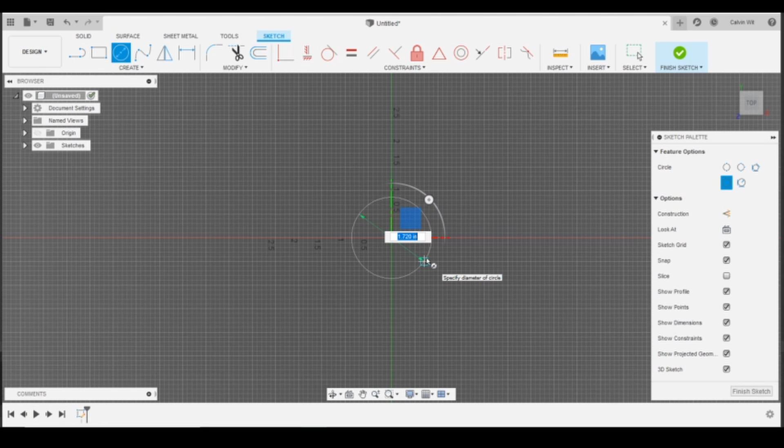So let's get going. First things first, I'm going to select the top view here on the view cube, press C for circle, and select my plane. In this case, the diameter of the base is 4 inches. I'm going to press Finish Sketch, and then holding down the Shift button and the middle mouse wheel allows me to move around. Alternatively, if I was in the top view, I could always click on this edge here. Personal preference, you do what works best for you.

Now we're going to press E to extrude, and we're going to pull this up 2 inches.

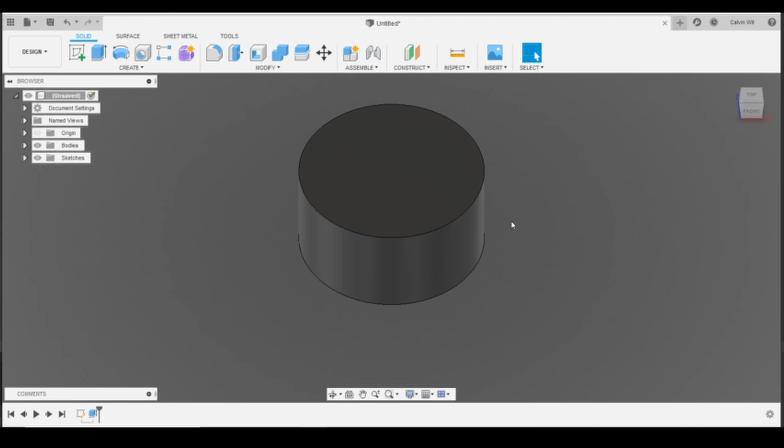Now we need to cut the internals out. So we can press C for circle, click on the top of the circle, and find the center, and we're going to want to come out 3.5 inches, and the base of our light is 3.25 inches. So we can press C again, and we can go 3.25 and hit enter.

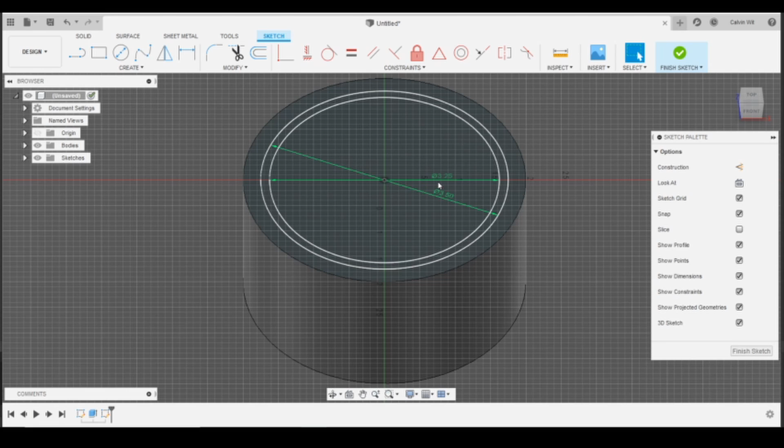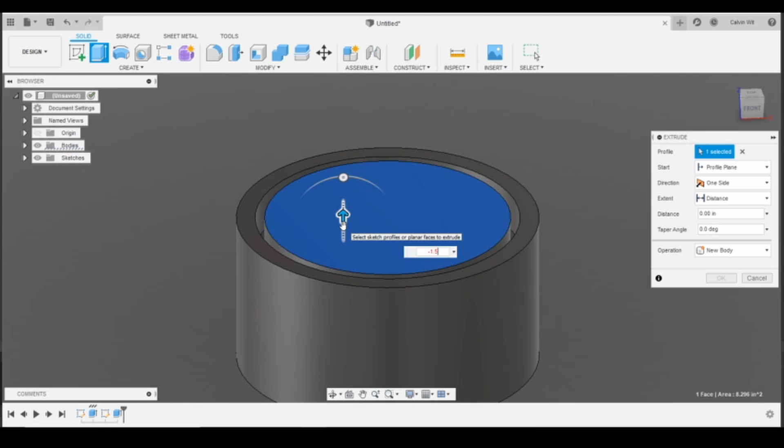Now what we can do is we can press E to extrude, and we can select, it doesn't really matter the order, but we'll just start with this guy here. It comes down negative 0.5 inches, and you'll notice that it's cut out the material that was there. That's what we want. Then we can press E again, and we can go negative 1.5 inches and hit enter. So now what we've literally done is we have created the base for our light. Nothing fancy, but it gets the job done.

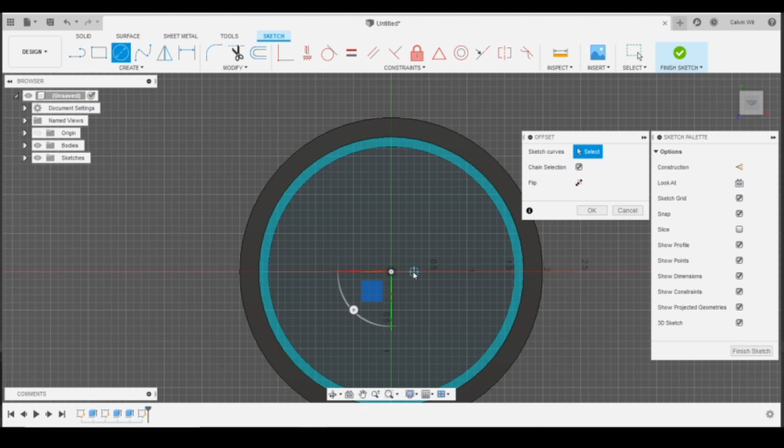Now what we can do is we can press C for circle, and we're going to want to select this lip right here. I'm going to switch back to the top view. There's two ways that we can do this. For the purposes of teaching you, I'm going to go O for offset, and I'm going to select this line here, and I'm going to go negative 0.125 and hit enter. So what that did is it took this edge here and pulled it in. Obviously, you could have just drawn a circle there, but for the purposes of showing this off, I figure that's an easier way.

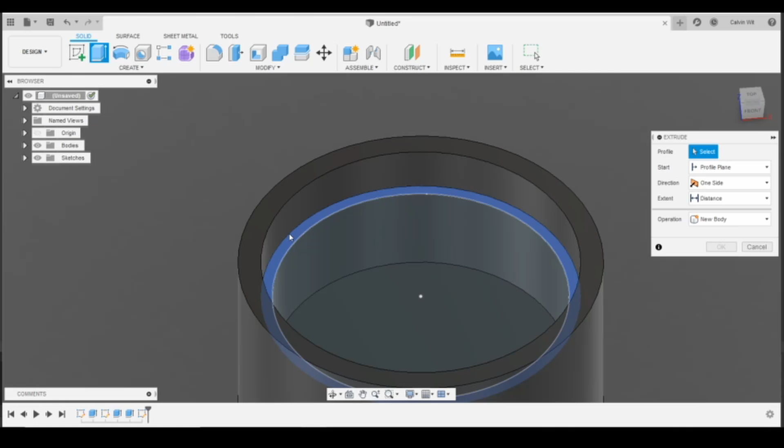So now we can press E to extrude. We want to click on here, and we want to pull this up 12 inches. Now you'll notice it automatically defaults to the join command. We don't want to do that. We want to switch to new body and hit OK. So what this did is instead of making these together, it's made them as two separate components.

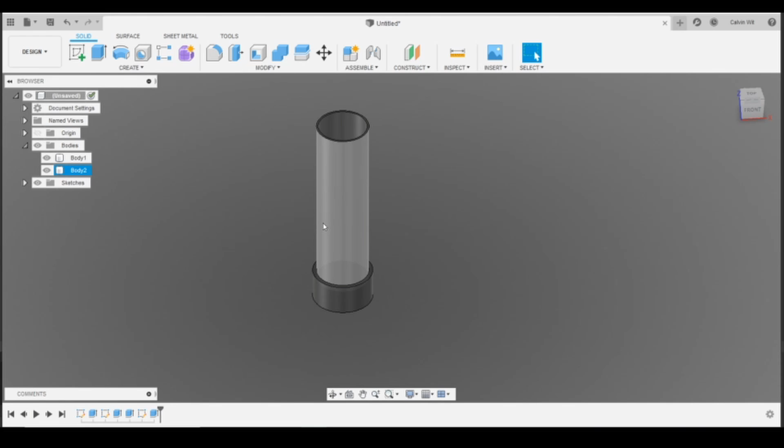This will come in handy because, say, the tube is going to be clear polycarbonate or acrylic. We don't want that connected to the bases. We want that to be separate. Also, if you're going to do rendering, which I will show you very quick, here's how to visualize what it would look like in a few minutes, you can do that as well. But the main thing is we don't want those to be connected.

So now we can switch back to the top view here, click on the top, go to top view, find our center point, and we can come out 4 inches.

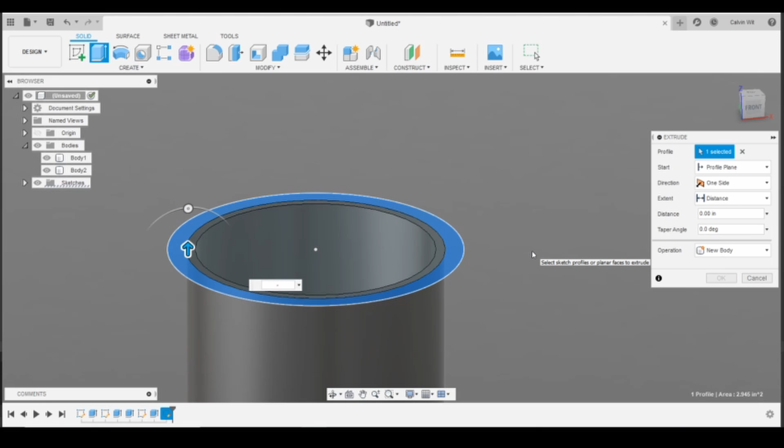And then what we can do is press E to extrude, and we can pull this guy down negative 0.5. As before, we want to do it as a new body and hit OK.

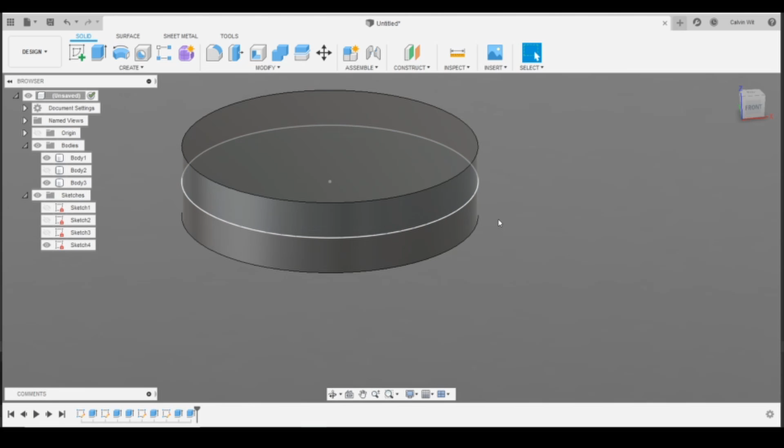Now we want to turn off the middle tube for the moment. Then we can click on the triangle here and turn back on sketch number 4. Hit E to extrude, click on the middle, this and that, and we can come up 0.5 and hit enter. Turn off the sketch, and hey presto, we have our light.

Now let's give this more of a realistic appearance very quickly by pressing the A button, which calls up the appearance tab.

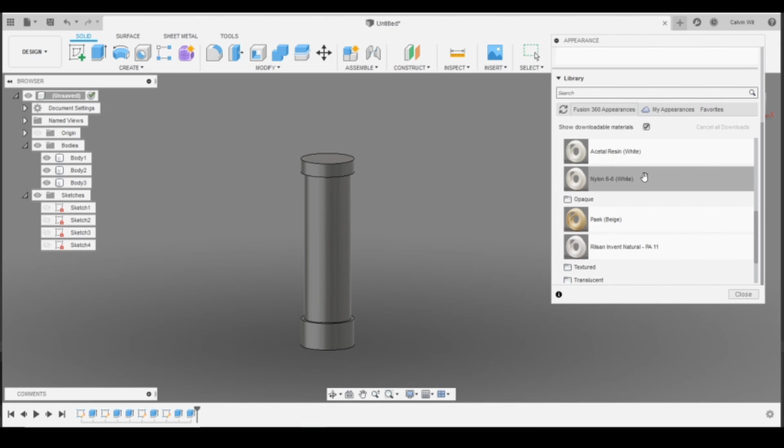We can go down to plastic, and in this case, to simulate the closest to the flexible material that I used would be nylon 6/6. So we'll just set that there, and we'll set that there.

Then we can come down to transparent, and we can click on polycarbonate clear, or you could really do any of the colors that are there, and hit close.

So now we have created the light very easily. And you can also see now that these are separate materials, you can see what it would look like.

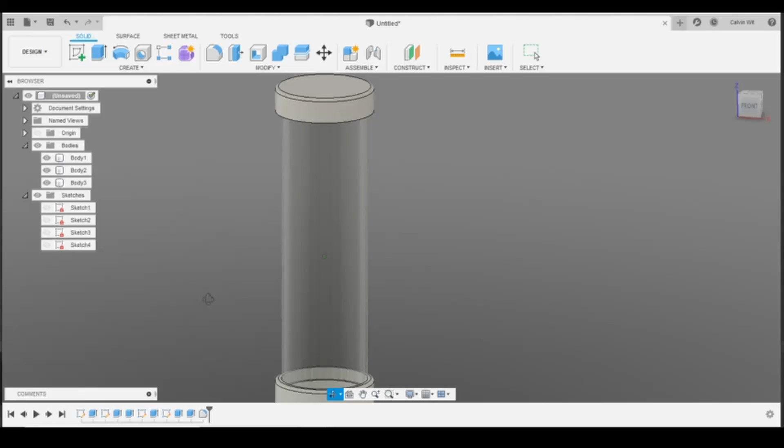I'm just touching on this for the purposes of if you want to mess around, but you can press on the fillet command and start adding some nice visual beveling to the items. Hit enter, you can mess around with it. I personally recommend doing that. Whoops, I didn't want to do that actually. You can mess around with that if you want. The main thing is I'm just trying to show you two different ways to do this.

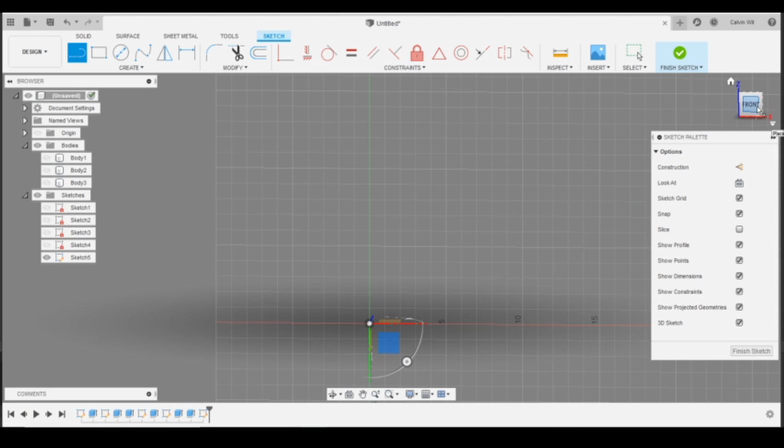Now let's work on drawing this exact same item using the Revolve command. So we're just going to keep this sketch up and click on the middle here. We're going to go back into the front view, but this time I don't want to draw it directly on the center. I'm going to come over to the side here so we can have the two side by side, and we're going to be drawing half the profile of the light in one sketch.

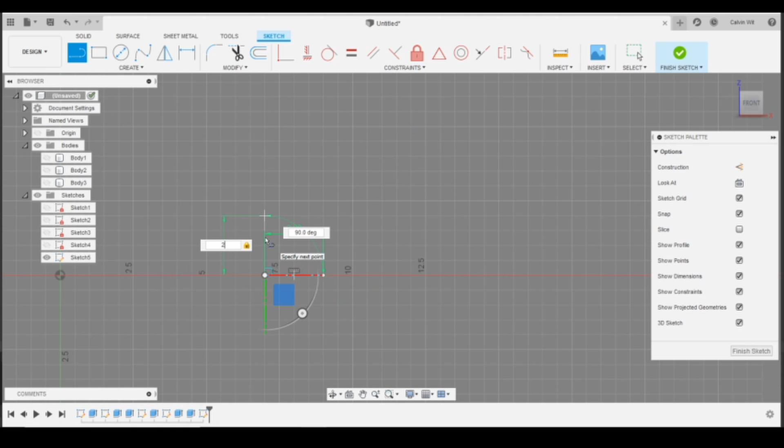Obviously our base would be 4 divided by 2, or 2 inches. We want to pull it up 2 inches. Now we also need to come along and make this distance 0.25. Then we want to pull this down 0.5. Whoops, I didn't draw that line. I want to pull that guy down 0.5 of an inch.

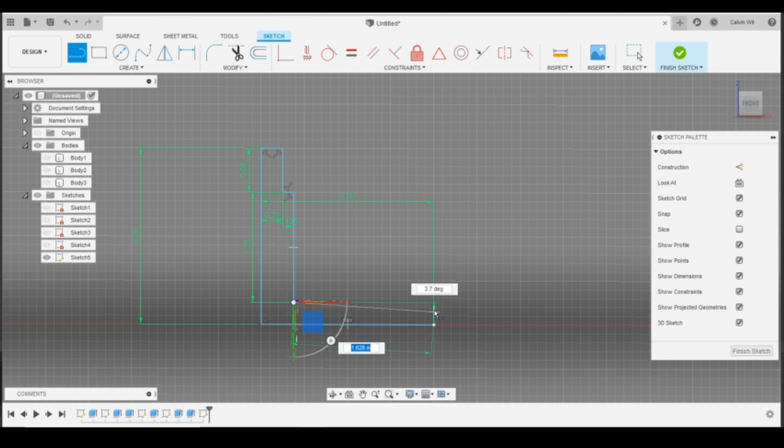There we go. Then we come over here, 0.125. Then we come down with this 1.5 — whoops, that was supposed to be 1.25. Then we come over with this, go over. You'll notice what I did here is I dragged my mouse down and then dragged it up so it snaps to that distance there, and go down, and there we have it.

So here is our very basic side profile, and if you look at this, you'll see that they look just about the same, which is perfect.

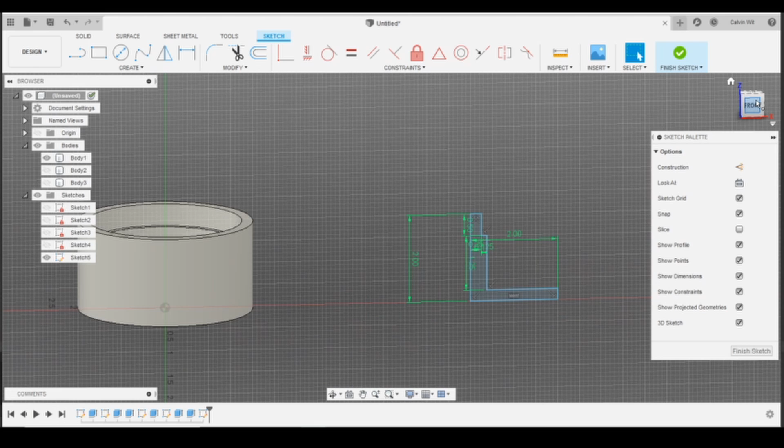Now what we need to do is draw the tube itself. So you can press R for rectangle. We can select that point and snap over. Alternatively, we can use the tab key to go between. We can go 0.125, tab over and type in 12, and hit enter.

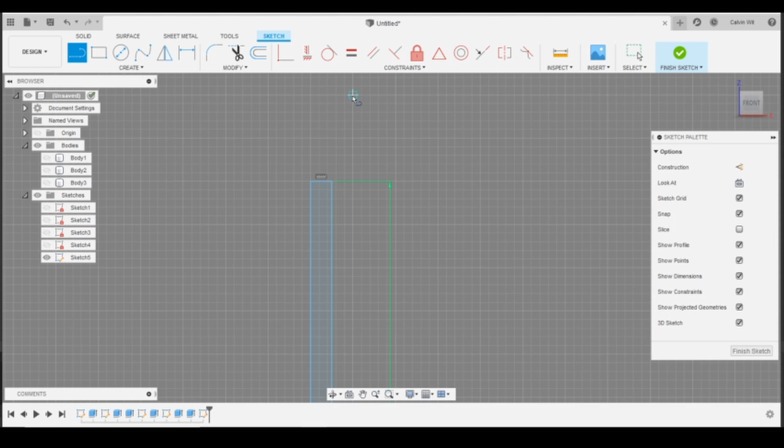Now we can zoom out and draw the top. So now we can draw a line from here down 0.5 of an inch. We can go over 0.25 of an inch. We can come up 1 inch. We can go across 2 inches, come down 0.5 of an inch, and come across to there.

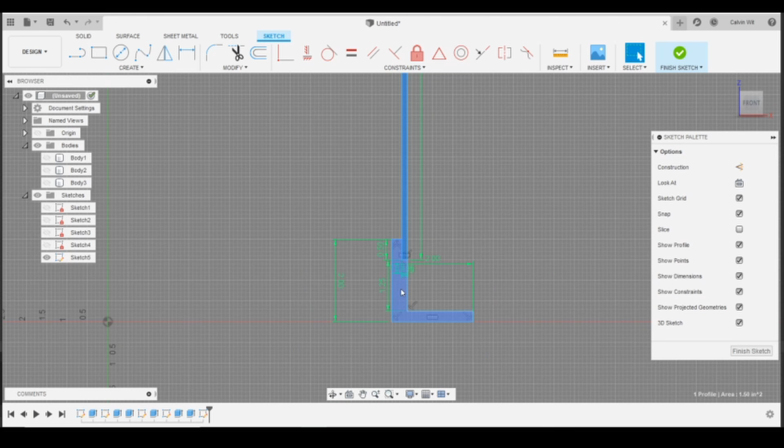Now you've got to make sure that all of your sketches are closed, otherwise this command will not work. So there we have it — there is the side profile of the 3 components that made up our light that you see there on the left. So we can hit Finish Sketch.

We're going to click on Revolve, and I'm going to select the top and the bottom pieces. Then for the axis, we're going to want to select this right here.

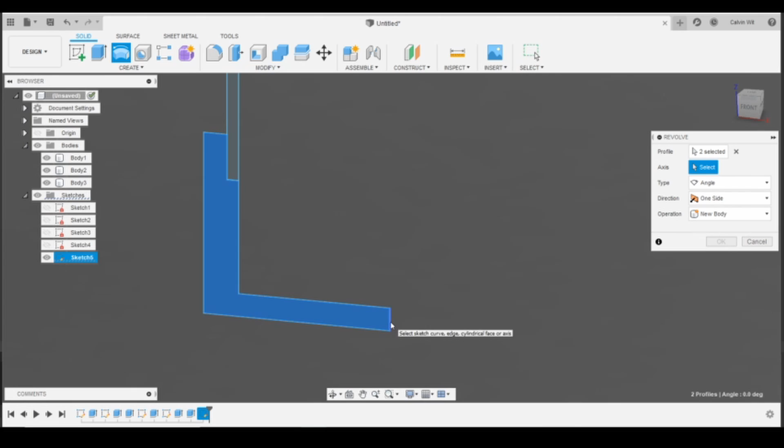If we had built this around the origin, we could have used that as well, but that would not have worked for this. Then we can hit OK.

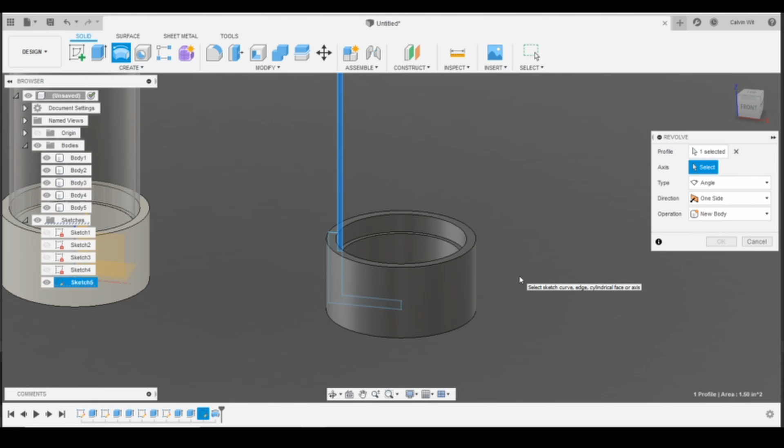We can turn back on our sketch, click on Revolve again, and use that as the profile. This time, since we already have existing geometry, both of these share the same center point, so they share the same vertical axis. I can just click on that and, presto, I've got my circle. Don't forget to make it a new body as well. Then we hit OK.

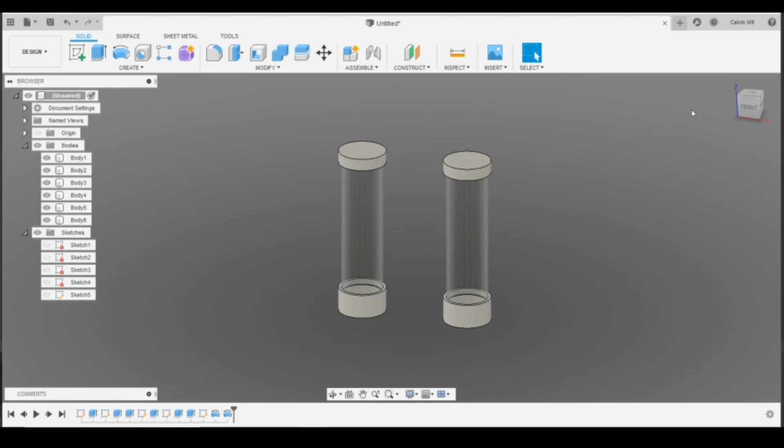We can do our very simple appearance again. Make the middle clear, make the top, make the bottom. Whoops, dragged that too fast. Make the bottom the nylon 6/6, close that out, and there we go.

Now, the only difference in building these is it took all of this to create the left-hand sketch, and it took all of that to create the right-hand sketch.

If you're starting out and kind of mucking about, using the left-hand method is not a bad idea. But if you already know how to do it and you're trying to go back and condense the drawing down, since you've extrapolated whatever dimensions you needed or already know the dimensions, using the revolve command is a much more efficient manner of doing it.

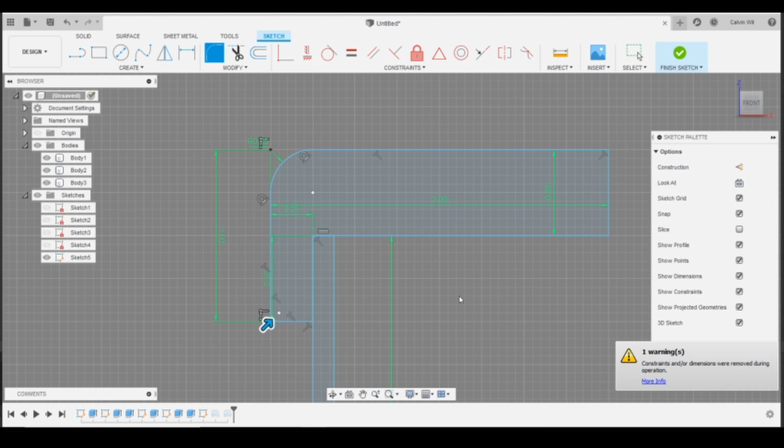Also, the advantage of using revolve is, let's say I wanted to add a nice fillet to this edge, and I'm not even worrying about the actual dimensions—I'm just typing in something that looks nice. Throw that in there. And we'll throw on something nice down here as well. Hit enter, finish the sketch.

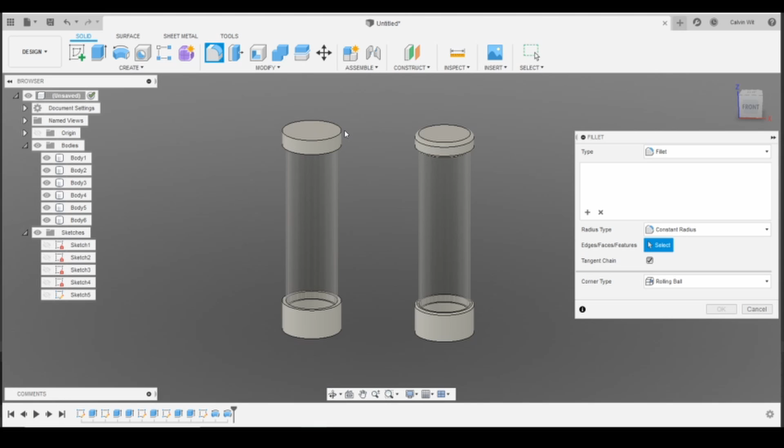Now all of a sudden our parts have that nice cosmetic touch to them, but I didn't have to go ahead, come over to the drawing, press F, and individually add them if they were different sizes.

They were automatically there. Now, the other advantage is I'm going to create a very simple texture on here using circles. So I'm going to go 0.125, press T to trim, and add a fillet between here and there of 0.125.

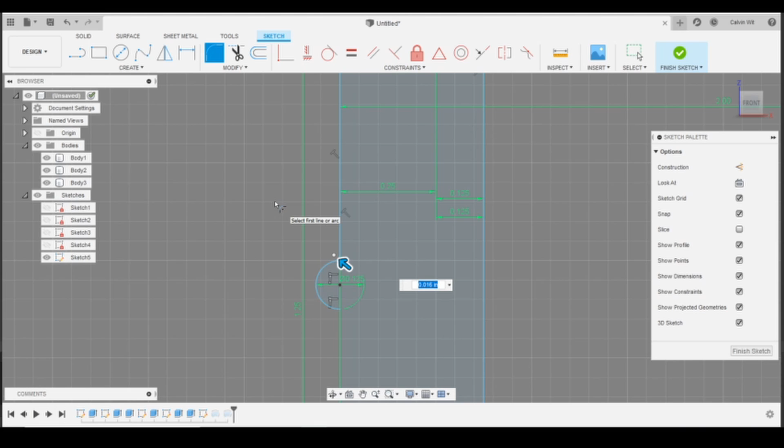We'll do that. Now you notice it took away the line that's there, so we can draw in a new line here. And then we'll do a fillet there as well, 0.125.

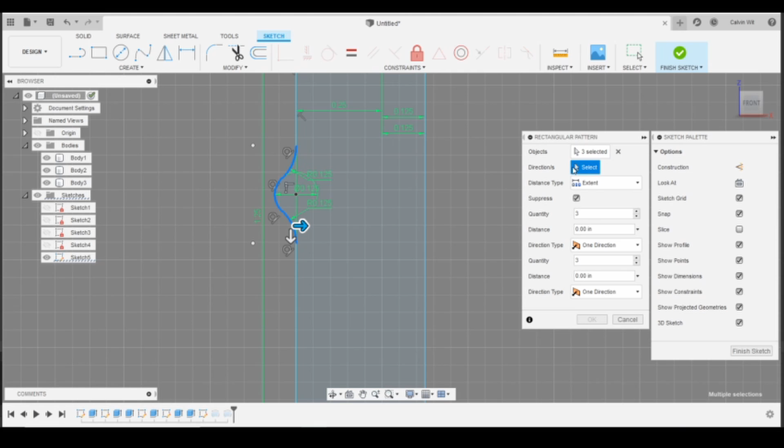Now, one other thing we'll use very quickly is rectangular pattern, and we'll select these. I'm going to do a video on this more in the future, so if you don't fully understand, don't panic—this is just for demonstration's sake. We'll make it spacing, and then make it like 5 of them.

There we go. So now we've created a side texture, and if we go back to our initial revolve, you can select those as well.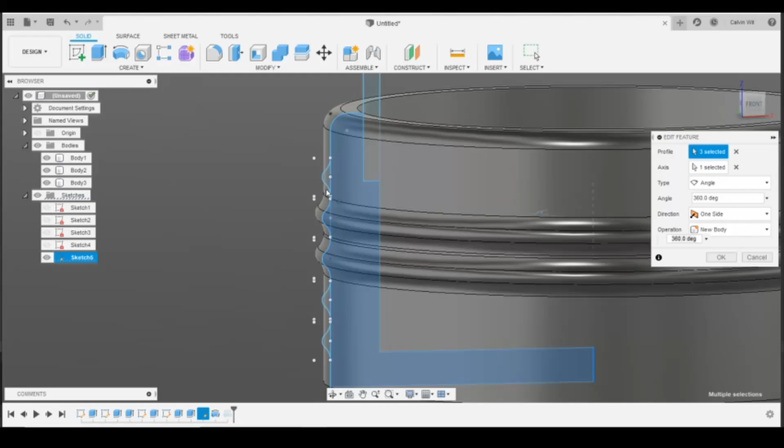We might want to turn off that. There we go. Sometimes when you're doing revolve, you have to deselect the axis, or it won't let you select individual components. Go back, select our axis, hit OK.

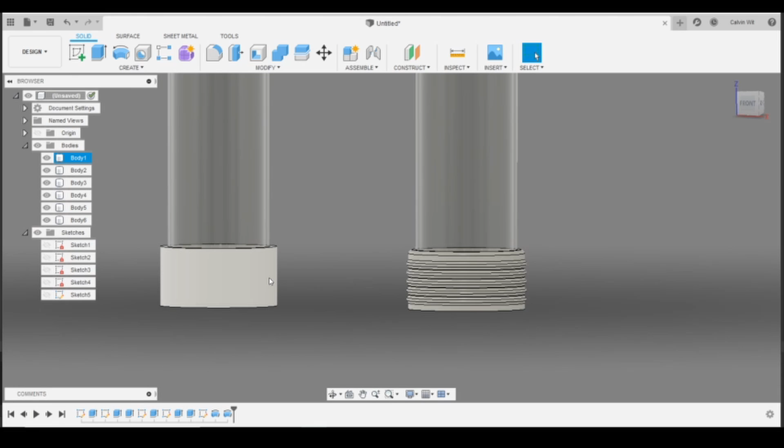And now we very easily put this really cool texture on the bottom with very minimal effort. If we were to try and do it on here, it'd be a lot more complex—we'd have to create planes or move and copy stuff. So there's a really good example of why using revolve for a round object, especially something that's going to have some texture on it, is actually the better way to go.